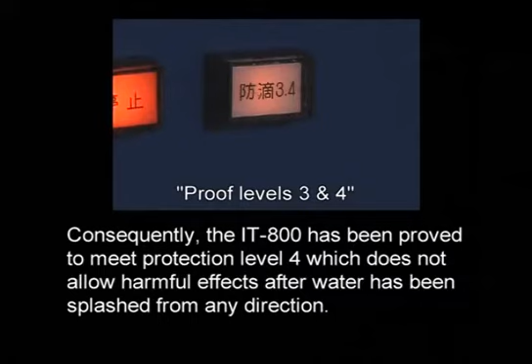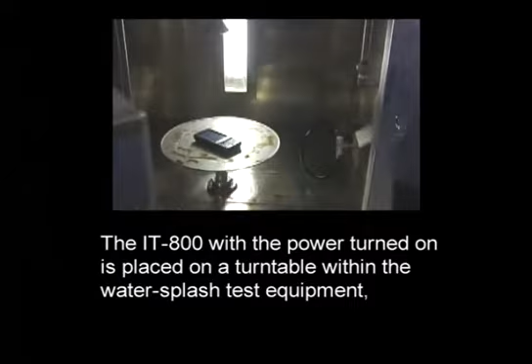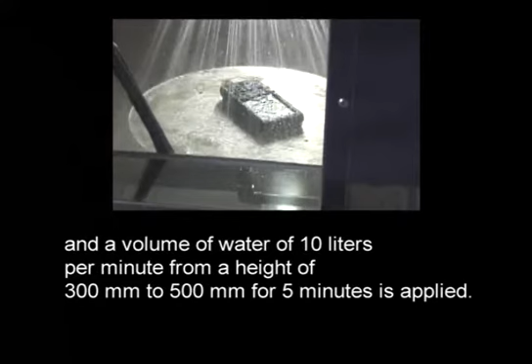The IT 800, with the power turned on, is placed on a turntable within the water splash test equipment, and a volume of water of 10 liters per minute from a height of 300 to 500 millimeters for 5 minutes is applied. During this period, the water pressure is set to 50 to 150 kilopascals.

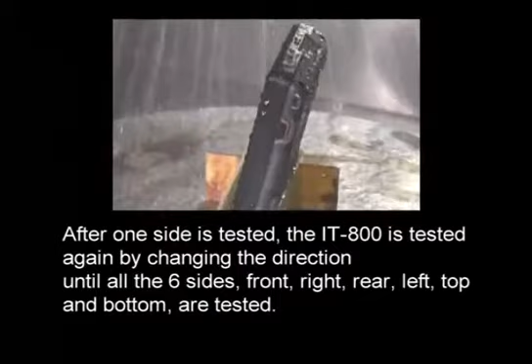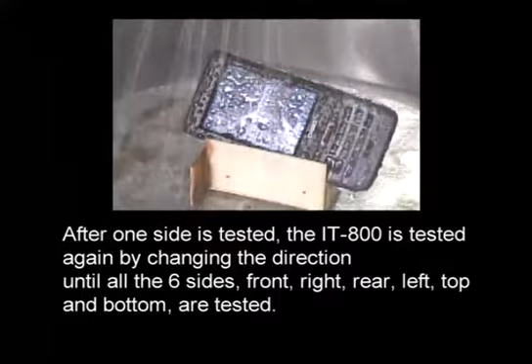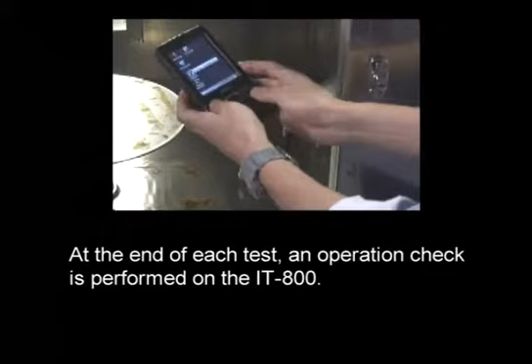After one side is tested, the IT 800 is tested again by changing the direction until all 6 sides—front, right, rear, left, top, and bottom—are tested. At the end of each test, an operation check is performed on the IT 800.

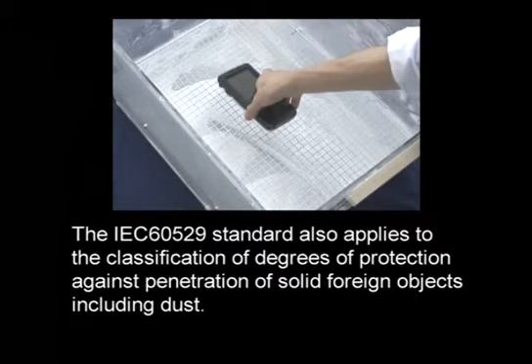Dust Proof Test. The IEC 60529 standard also applies to the classification of degrees of protection against penetration of solid foreign objects, including dust. The classification of degrees ranges from 0, non-protected, to 6, dust-tight, the highest possible rating.

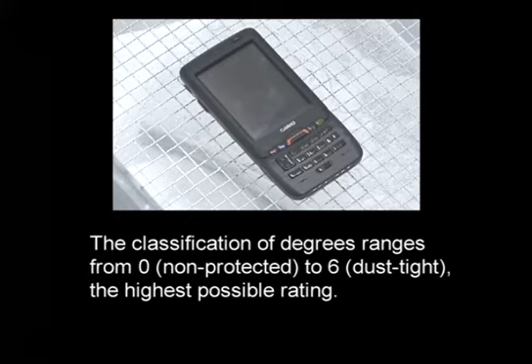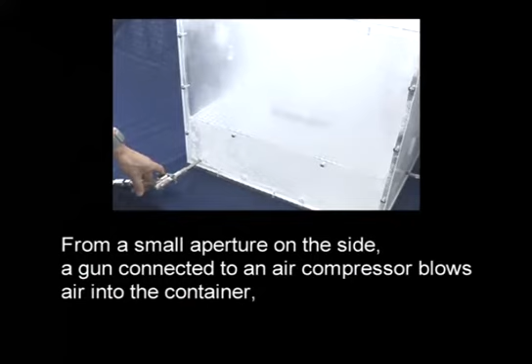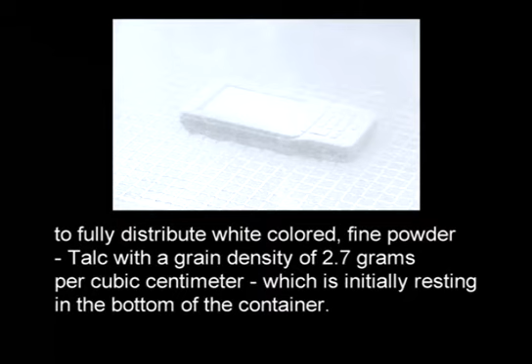The IT 800 is firstly placed in the center of an airtight container. From a small aperture on the side, a gun connected to an air compressor blows air into the container to fully distribute white-colored fine powder, talc with a grain density of 2.7 grams per cubic centimeter, which is initially resting in the bottom of the container.

Once this operation is complete, the container is tightly closed. It takes nearly 1 hour for the powder to settle on the bottom of the container and over the IT 800.

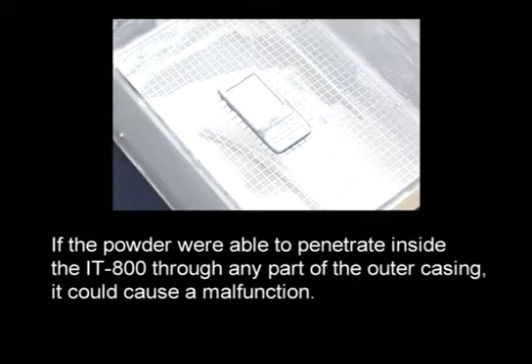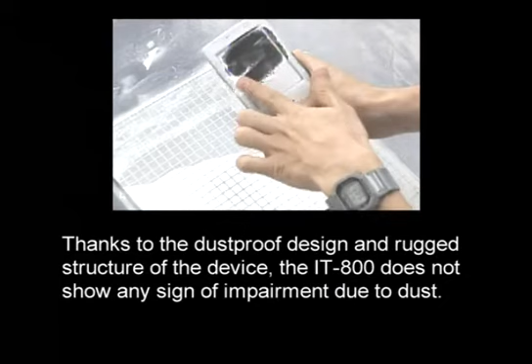If the powder were able to penetrate inside the IT 800 through any part of the outer casing, it could cause a malfunction. Thanks to the dust-proof design and rugged structure of the device, the IT 800 does not show any sign of impairment due to dust. This proves that the IT 800 meets the criteria for protection against dust, dust protected, which equates to IP code 5.

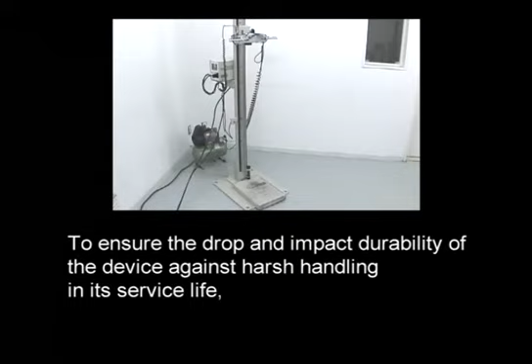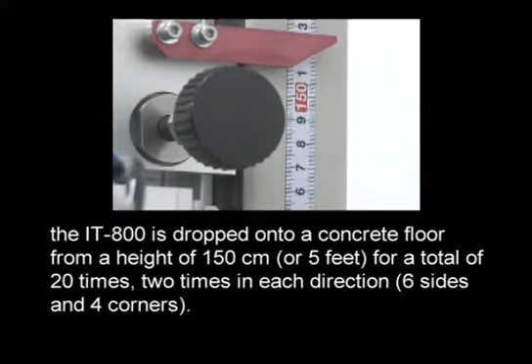Drop Durability Test. To ensure the drop and impact durability of the device against harsh handling in its service life, the IT-800 is dropped onto a concrete floor from a height of 150 centimeters, or 5 feet, for a total of 20 times, 2 times in each direction, 6 sides and 4 corners.

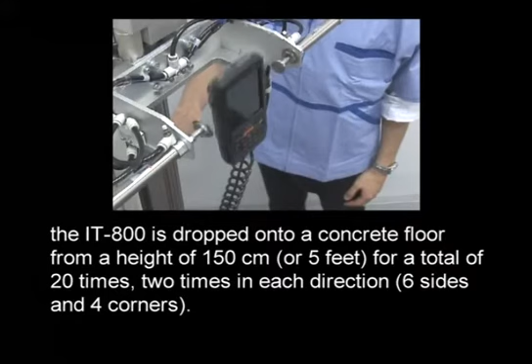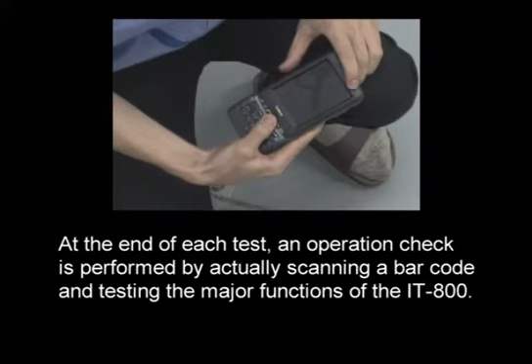At the end of each test, an operation check is performed by actually scanning a barcode and testing the major functions of the IT-800. After 20 drops to concrete, the IT-800 is considered to have passed the drop durability test.

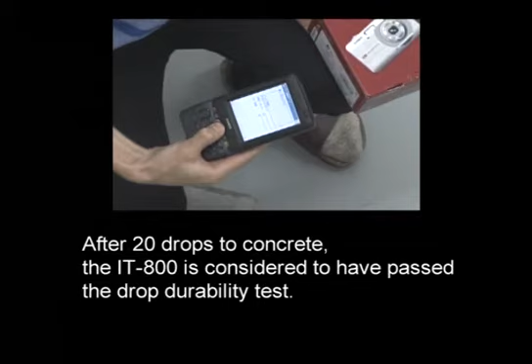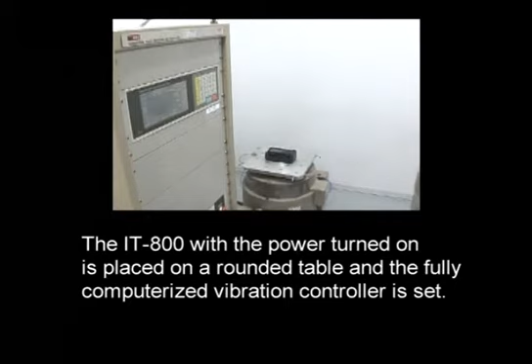Vibration test. The IT-800, with the power turned on, is placed on a rounded table and the fully computerized vibration controller is set.

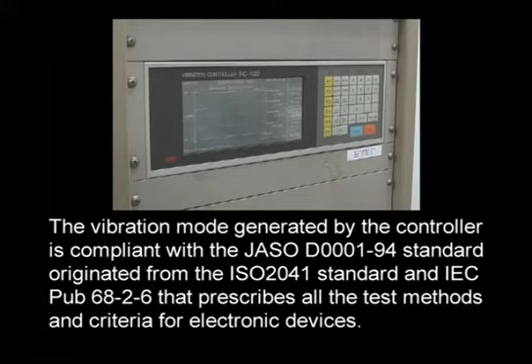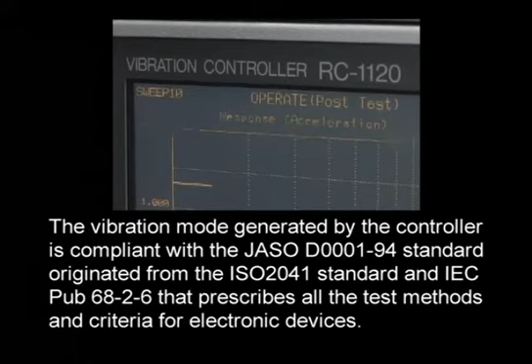The vibration mode generated by the controller is compliant with the JASO D0001-94 standard, originated from the ISO 2041 standard and IEC publication 68-2-6, which prescribes all the test methods and criteria for electronic devices.

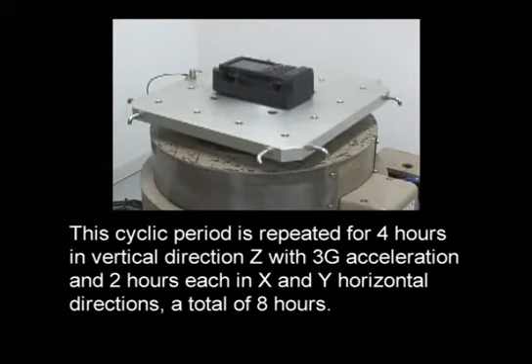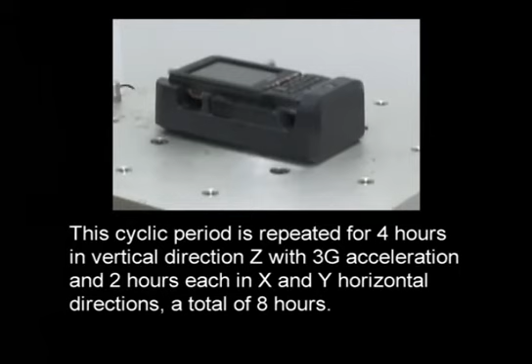The vibration starts with a low frequency at 5 Hz and increases until it reaches 200 Hz in 10 minutes, then is gradually reduced to 5 Hz. This cyclic period is repeated for 4 hours in the vertical direction Z with 3G acceleration, and 2 hours each in the X and Y horizontal directions, a total of 8 hours.

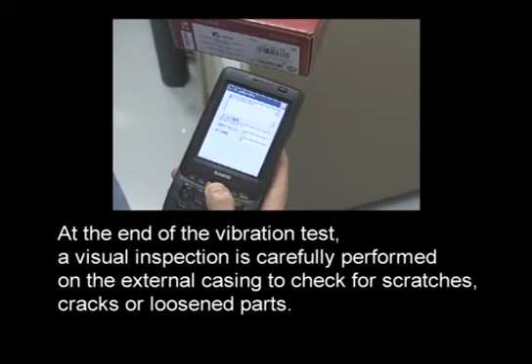At the end of the vibration test, a visual inspection is carefully performed on the external casing to check for scratches, cracks, or loosened parts. All major functions, including scanning barcodes, must be performed without any error.

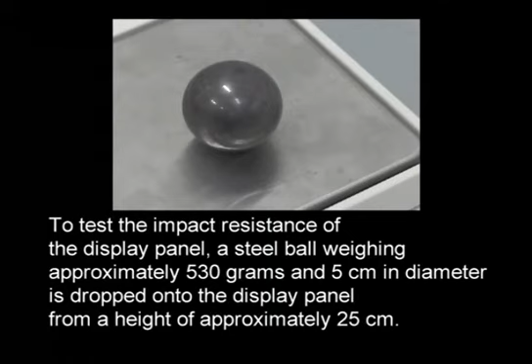Display panel impact test. To test the impact resistance of the display panel, a steel ball weighing approximately 530 grams and 5 centimeters in diameter is dropped onto the display panel from a height of approximately 25 centimeters.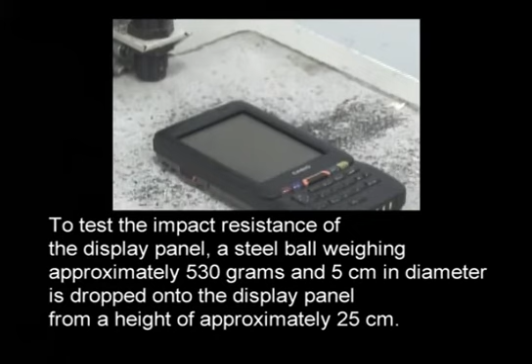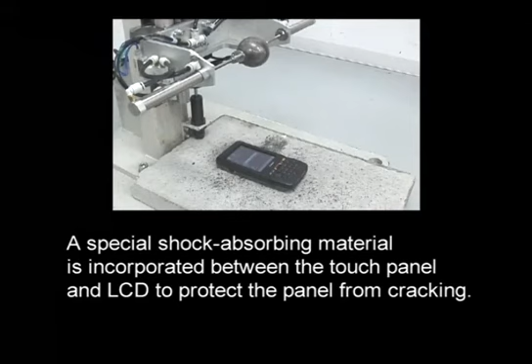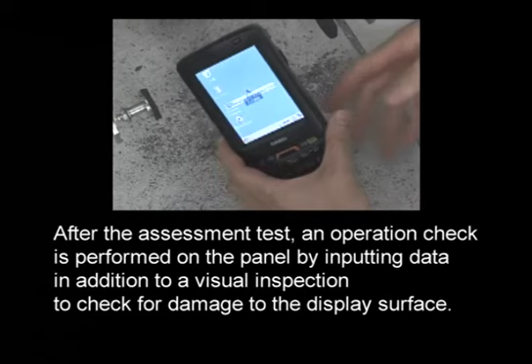A special shock-absorbing material is incorporated between the touch panel and LCD to protect the panel from cracking. After the assessment test, an operation check is performed on the panel by inputting data, in addition to a visual inspection to check for damage to the display surface. This is the most rigorous and absolute assessment test ever applied in the history of the LCD panel.

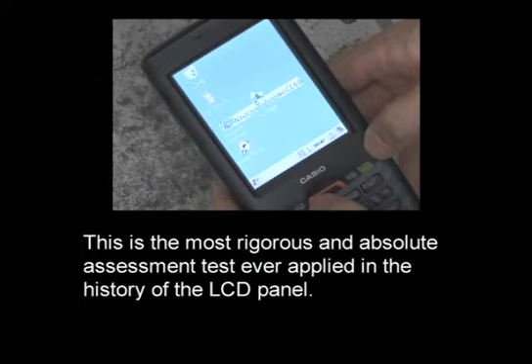Powerful, flexible, rugged IT-800 series.